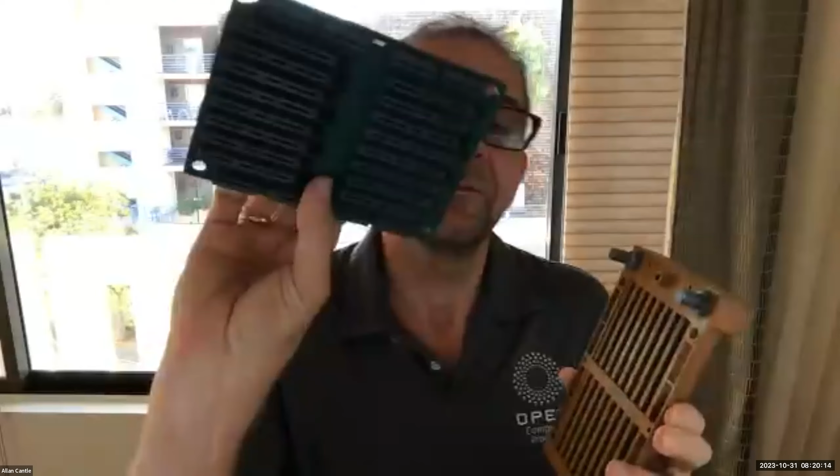And then this is a PCB with the big chip on it. My son kindly made this 3D model for me and painted it nicely. So this proves very, very useful. So we see the big chip on the front, and we see like a mini backplane on the back to carry all these modules. And that then inserts on there, and we have the conductively cooled element,

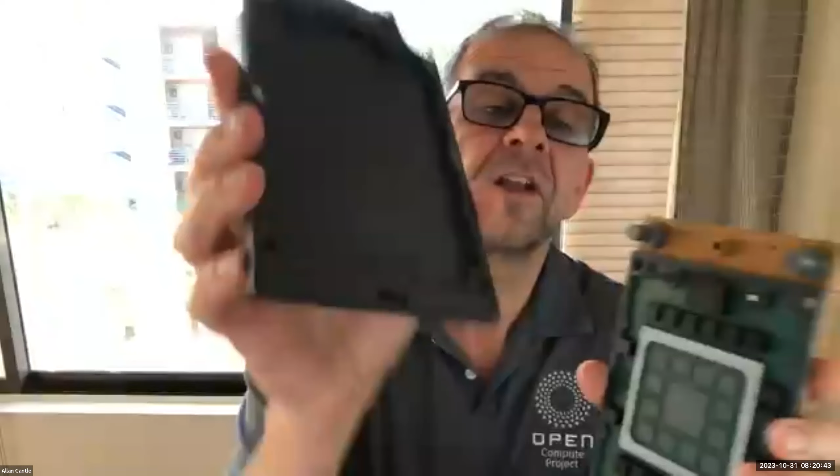and then the lid comes on, and the water flows in the bottom part from the manifold here. And then it literally floods. So it's like a little mini immersion chamber here, floods across and then returns back out the top, back into the module here, and out of the return pipe, back on the hot return. So that's the water flow.

And also what I didn't touch on is we bring 48-volt power in here on these 2 pins. So that can carry up to 74 amps. So in theory, you could bring 3.5 kilowatts in, I think. But the power comes in here, and in the wall at the moment we're still in the development phase of how this wall piece will be going. I'm talking to Murata, the chap who's joined a few times from Murata, basically looking at designing the power brick to go from the 370 volt AC or whatever the infrastructure power is to the 48 volt DC in the wall itself here.

And we'll also have a valve control, which is something that we need to design and define to actually control the flow of water. So depending on how much power the module is burning, the outflow is always 65 degrees C out of the module. So we've got reusable hot water for energy recovery purposes. So that's basically the physical module setup, and then we have the E3.S modules that obviously go in here as well.

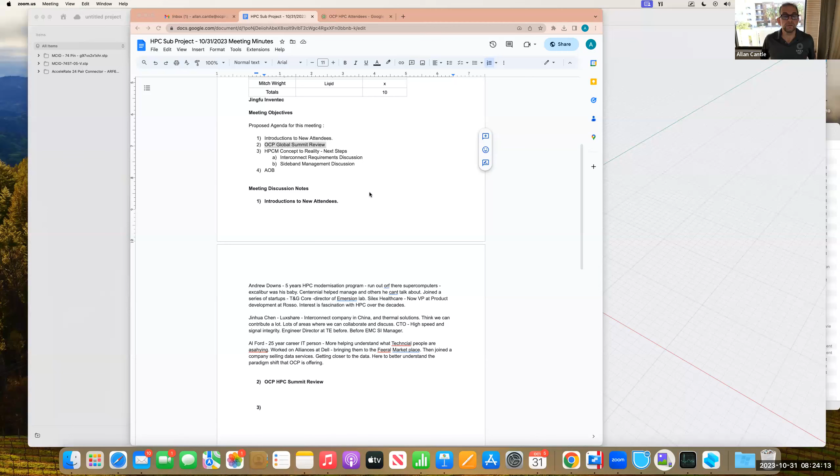Okay, thank you. All right, so on to our next topic. So HPCM concept to reality. So on our last meeting, which was a month ago now, because we had a skip in the summit, we talked about breaking ourselves down potentially into some work groups.

And in terms of getting things moving, the power and cooling, I've got a plan with Progress Analog and the University of Illinois with their conformal coating of copper for cooling purposes, immersion cooling purposes, and they have offered that they can potentially 3D print our manifold, so that could be quite interesting in terms of the manufacturing of this. We've got several ideas on how to manufacture this, but this is sort of early days.

Hopefully there's funding coming from a large defense company in Europe, which will help us to sort of put on the gas pedal a bit quicker. We're still working through details on exactly how that will work, but this one's beginning to take a level of structure, which we really do need to nail down on the power delivery and the cooling infrastructure for sure.

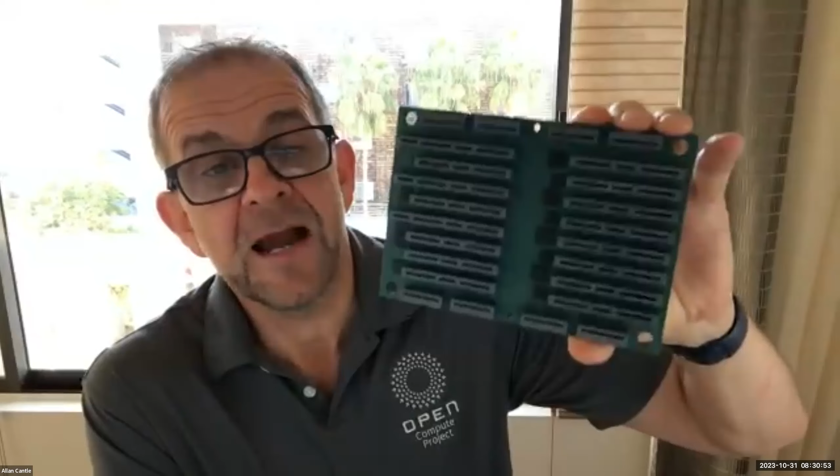So just on the interconnect, there's a couple of things I want to start talking about. We can see that we've basically got a mini backplane here of all these connectors, literally covering the entire back of the card. But on the front, we've got this big processor with 4,000 or more balls on it. We also have the power supply infrastructure that we need to design around.

These connectors typically have through-hole connections on them for mechanical rigidity and alignment purposes, for pick-and-place alignment. So we can't afford any holes in boards, because connectors with through-hole features often cause major congestion of routing problems, through my experience over the last 30 years. We really need to get rid of all of the through-hole interconnect features on these standard TA1002 connectors. The ones we've shown here are actually MCIO.

I'll come on to the topology ones, which are somewhat more complex in terms of our choices. We've got a thought process to go through there. My plan is not to answer any of these questions today, just to introduce the challenges we need to overcome to make this into a reality.

So firstly, we need to get rid of all through-hole interconnects. Let me just switch back to sharing my screen and bring up my model.

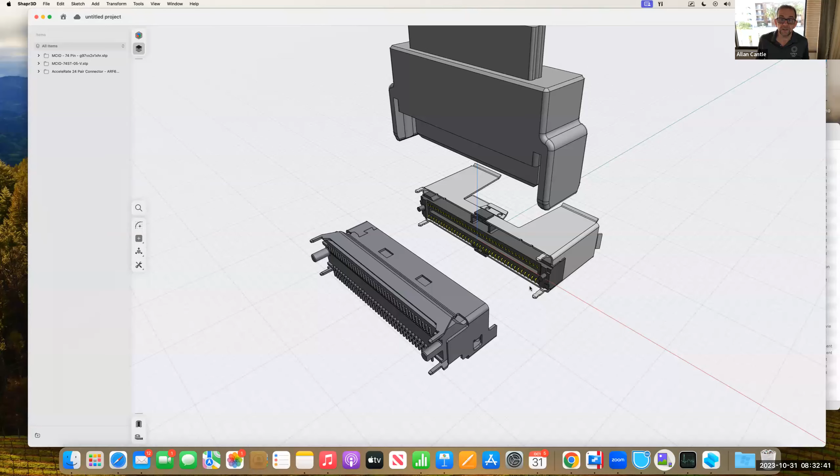I've just pulled in a couple of connectors here. This connector here and this piece here are the MCIO connector. I'm not sure which variant this is from which manufacturer, but basically this is the MCIO connector, the 8-lane PCIe interconnect. MCIO is the PCI-SIG standard for it.

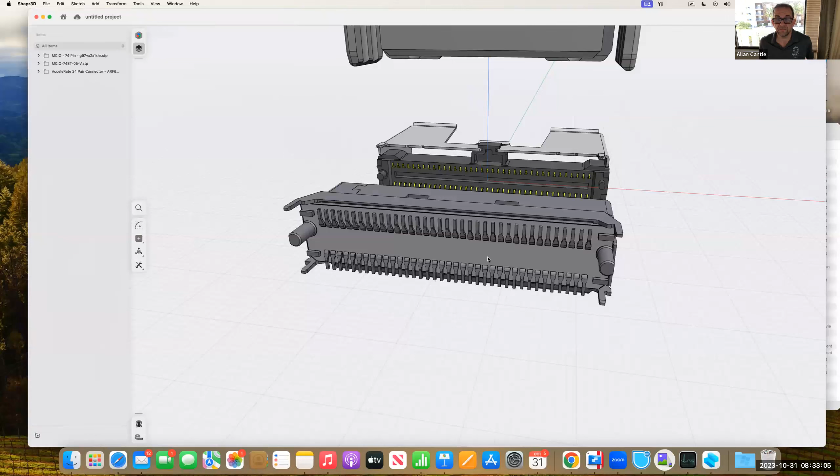We can see that our signal pins are all surface mount, but on this one you can see these mechanical alignment features. I think these are alignment pins, quite big ones on this particular connector. Then you've got some metal ones which are just part of the metal frame, for mechanical rigidity, because you can very easily tear these connectors off when you've got something the size of an E3.

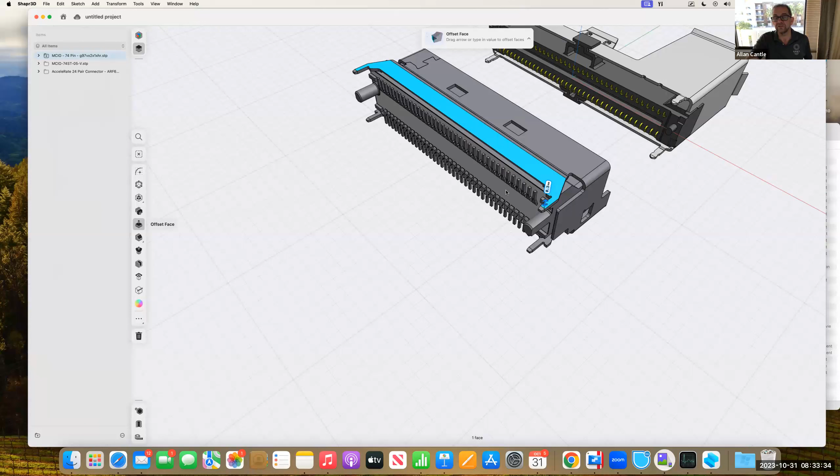Well, this is actually one of the topology connectors, apologies - this is one of the edge ones. Let me just pull in a TA1002, the E3.S1 as well, so you can see that.

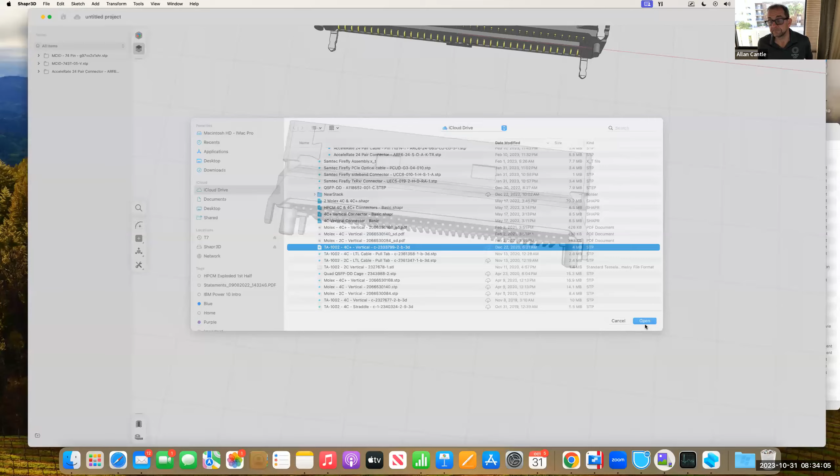There you go, 4C plus vertical. Let's just bring that one in. Okay, so there's our 4C plus. Let's pull that up and away.

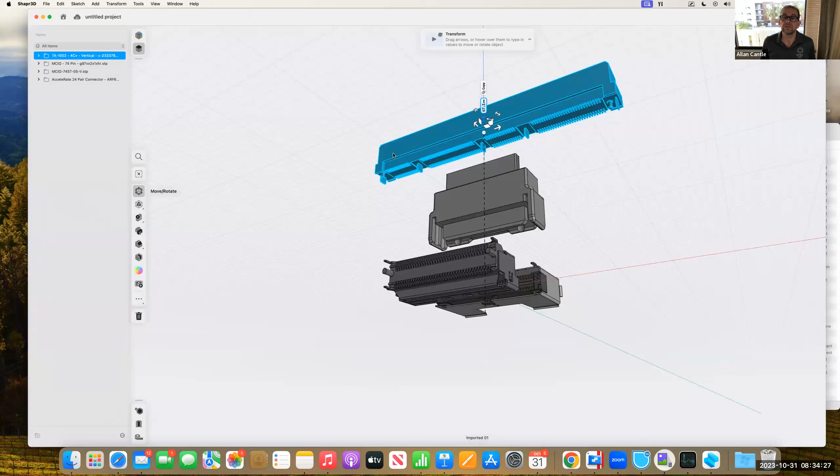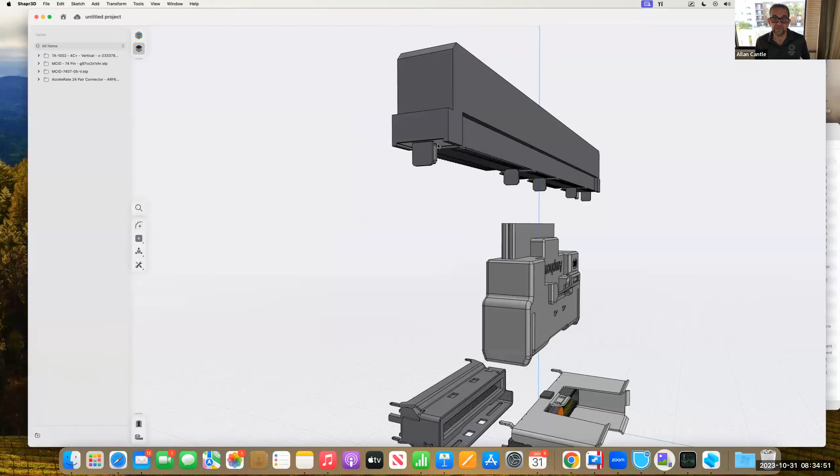We can see this one has 5 metal tabs on it for mechanical rigidity, and 2 alignment pips on either end. So those are the through-hole features of the card - these are the ones we need to replace. We can flatten these to be surface mount, fairly decent size surface mount pads, to give it some rigidity.

We may need to consider some additional features as well, but that's the initial thinking there. Let me just cover the basics. So that's the first one.

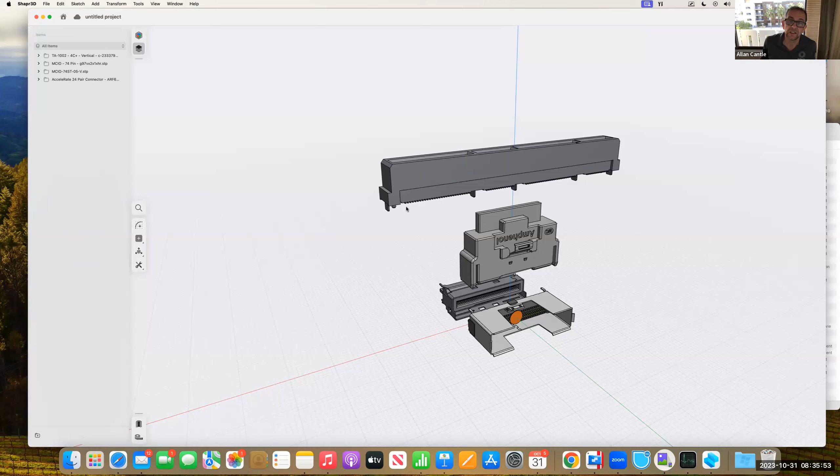We want to get these connectors. Now these are quite easy to remove manually. If you are doing a prototype population, we can take the connectors, but it would be good if the connector manufacturers could maybe consider variants of this with surface mount only.

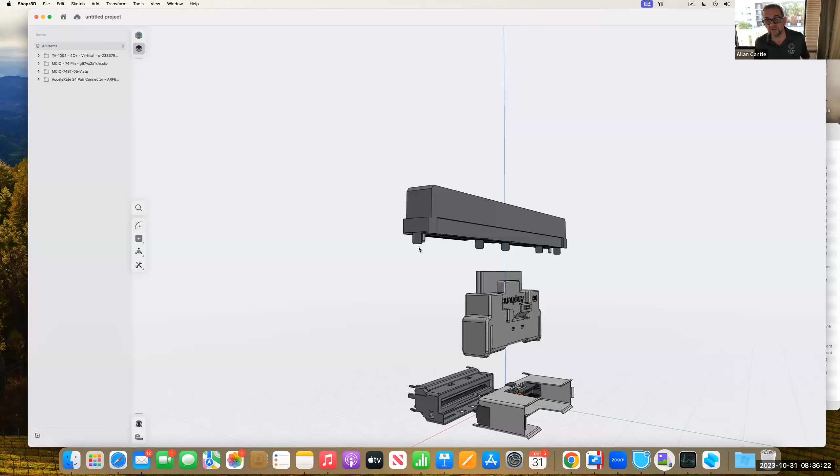So I've spoken to the chap who's just joined, Jinhua, and I've spoken to Molex, I've spoken to TE, I've spoken to Samtec. So we need to do that. We'd obviously need to do this in OCP, so that there would need to be a standard that is open, that everyone can adopt under the OCP rules, because this is a very important area for interconnect.

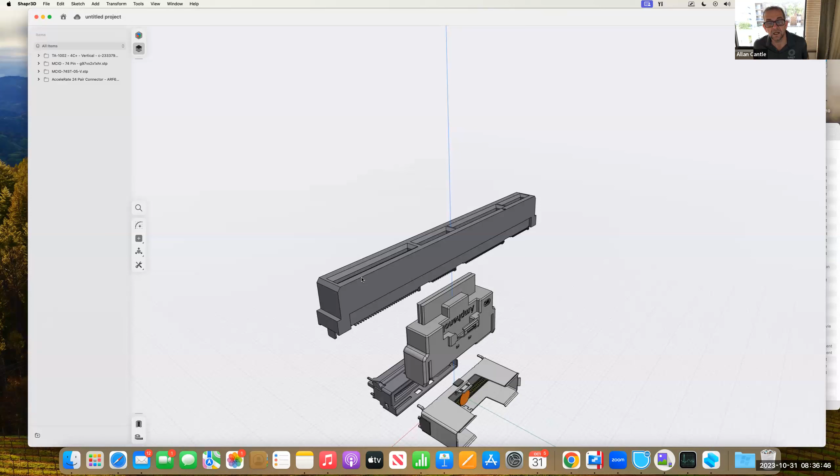That's something we're going to need to discuss, because really it's being able to plug E3 modules in that is the important thing. Ideally, it would be good to have the same footprints as well.

The features in the connector, how good they perform, is down to the different manufacturers. So that's the first one. So we need to do the TA1002 connectors, the 4C and 4C plus, and we need to do the MCIO.

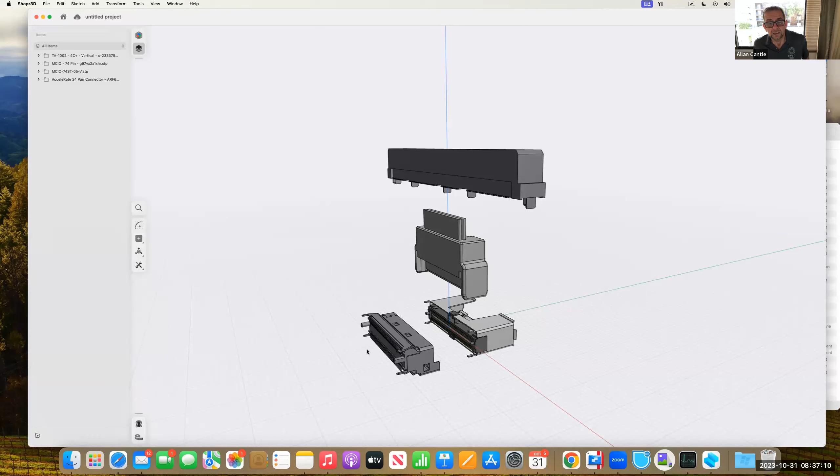Now, on the MCIO, let's stay on the connectors at the moment. So the MCIO, just to remember, is back to the video, is these topology connectors. So the 8 connectors on the outside.

So we need to, these are ones where the cables will plug into. And the reality is here, these can take many forms in terms of the signals they carry.

So they could be proprietary links like an NVLink or an Infinity Fabric or a UPI from Intel, or they could be PCI CXL, as we know that CXL is becoming a fabric, being able to connect between CXL switches into the CXL-based devices.

Obviously, we've got the E3 devices that could be CXL, like the Samsung drives, that could be directly mated in here. But these cables for the topology will carry that. So we need an MCIO connector that gives us the ability to take PCI and CXL between modules.

However, if we think about it, Ethernet is another popular one that we'd want to connect between devices as well, and obviously these proprietary ones.

Now, Ethernet doesn't typically carry any sidebands. MCIO has a whole bunch of sidebands, and so we could say, well, what I really want on these connectors is one connector for all standards, right?

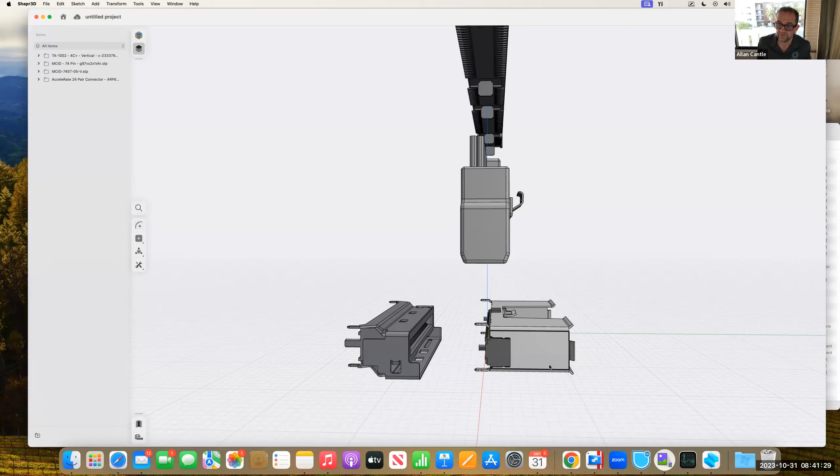But if you look at other connectors, they're a little bit more proprietary on the Ethernet side of things. Molex have their Near Stack, and I think Jinshu did show that they also have a license to make the Near Stack ones as well. And Samtec have their Accelerate interconnect, which does the Ethernet at 112.

I don't believe that Near Stack or Accelerate are going to make it to 224 as they are today, but we could possibly normalize on one of these.

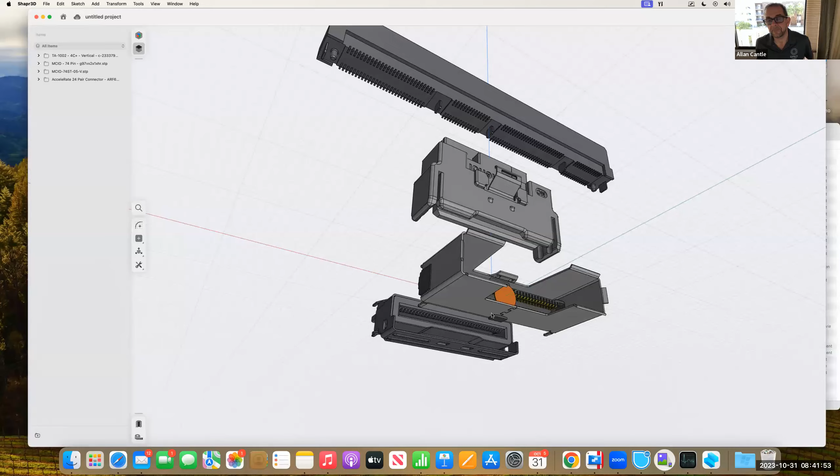Then the next question is—MCIO, PCIe carries a tremendous amount of baggage of sidebands, which are expensive for the cable manufacturers to handle, these horrible little single-ended signals. In fact, it's cheaper for them to make cables with twin-ax than with single-ended signals. So what I'd like to do, and I'm coming a little bit onto the sideband side of things...

Something that Lattice did in open source, and that OCP has adopted, is called LTPI, which basically carries all of the sideband signals over one differential pair. So I'm beginning to ask, should we as a group define a standard where, on the connector front, we've got 8 lanes plus a transmit and receive sideband—so 2 pairs, 2 diff pairs for that—plus maybe a transmit and receive clock if that was desirable. That would be it basically, a connector optimized for that.

Strictly speaking, MCIO could do that for us. And by the way, we also need power, because we want to be able to plug in active cables. Now PCI SIG did have active cables in their previous generation, called OcuLink—the O stood for optical and the CU stood for copper, the symbol for copper. But when MCIO was brought to the party, they forgot about optical cables, and there's no power on the current MCIO.

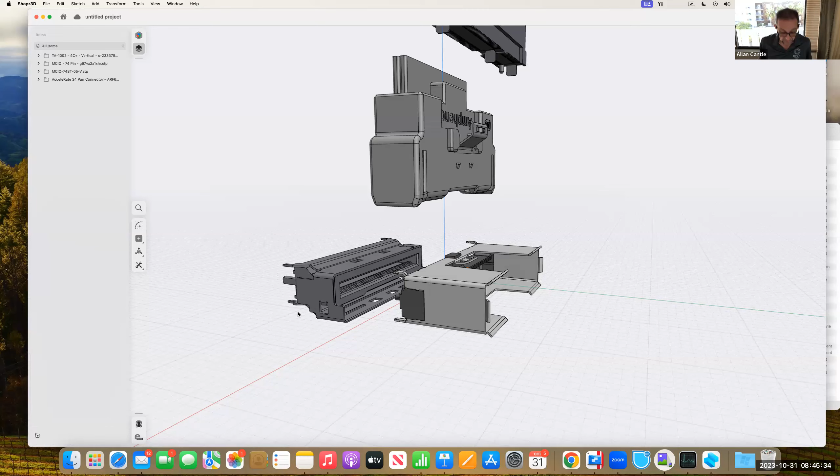So that's one area where I think we can make a significant contribution to the industry in general, trying to sort this interconnect out, because it's a bit of a myriad mess as far as I'm concerned—there's just so many different connectors out there addressing these different things. So that's the area I wanted to really cover.

There is one other area. Let me just stop sharing again and go back to this full screen.

On these connectors, we have our module that plugs in, and you can see the interconnect there. We have this thermal connection as well. I talked to a couple of the interconnect guys about this, and I had an idea, I think, from Chris at TE actually. So we've got interconnect pins on here.

They're like big fat electrical pins, but they're sprung loaded, a bit like EMC gaskets, was the best way somebody described it to me, where we're trying to get a thermal connection between the module and the water flowing through this manifold.

So basically, when you plug in one of these modules, you get that thermal mate to the body. Chris had a good suggestion of putting the EMC gasket equivalent, like the thermal gasket, on the module itself, which would be a lot easier to assemble. Then as you push it in, you get that thermal connection.

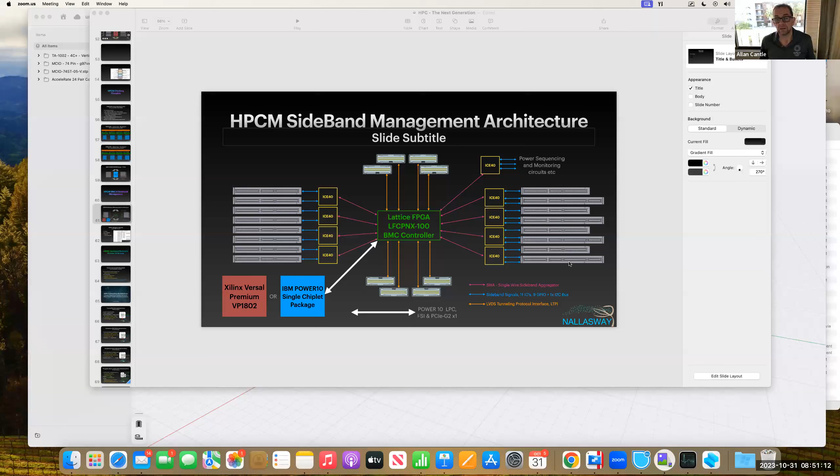Okay, so here is an old diagram. This has been around for well over a year in terms of what we're planning to do on the sideband management. So I see this as being the same basic circuit that we're going to use for all modules, and the connection to the processors or accelerators will be the only variant.

But we want to make sure we can cover the bases - processors typically have a little 1-lane PCI interface of some sort for controlling, for talking directly to the BMC, plus a bunch of what they call LPC, their low pin count interface. And so we want this standard BMC that can actually boot the module in standalone. I think that's a very important point.

So the structure you see here is very tightly intertwined with the interconnect, because the interconnect carries a tremendous amount of baggage. We've got something like 8 to 12 pins of sideband on every one of these TA1002 connectors.

What you see there is a Lattice ICE40 device, basically a small CPLD slash FPGA, where the blue lines are the sideband signals. In the bottom right-hand corner it says you've got 11 IOs, there's 9 GPIOs and 1 I2C bus on those sidebands.